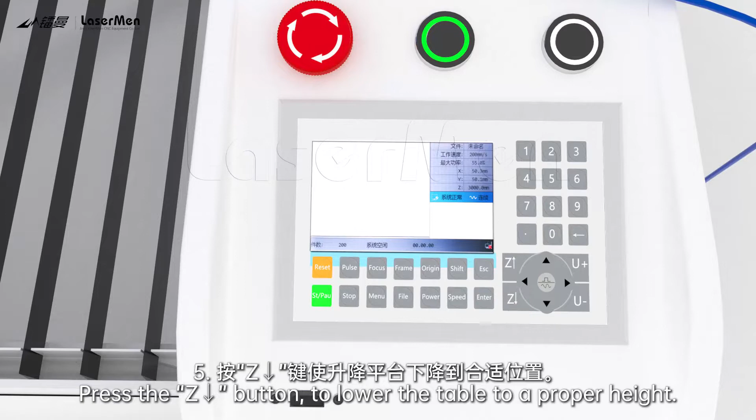3. Press the button to move the laser head backwards. 4. Put the rotary on the machine table. 5. Press the Z↓ button to lower the table to a proper height.

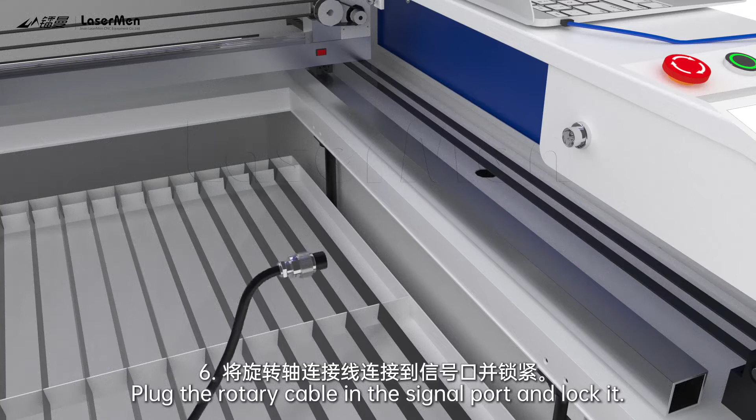6. Plug the rotary cable in the signal port and lock it. 7. Press the direction buttons to move the laser head to be right above the rotary.

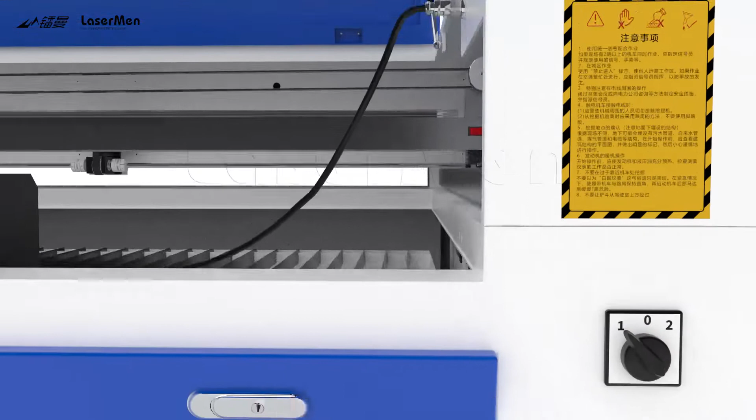8. Turn the switch to port 2. 9. Draw in laser software.

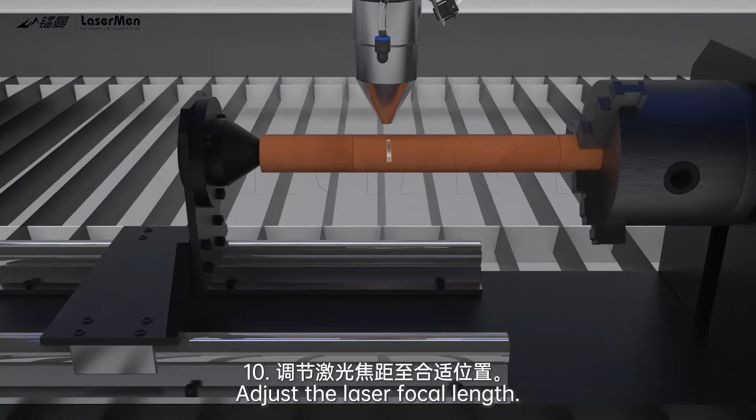10. Adjust the laser focal length. 11. Press origin to locate the laser head. 12. Press start/pause to cut.

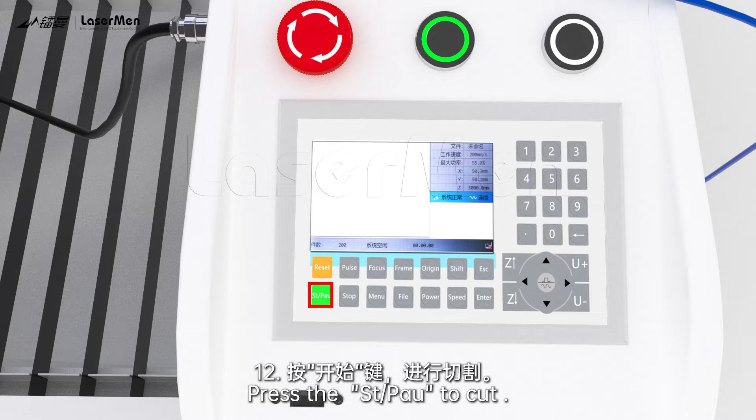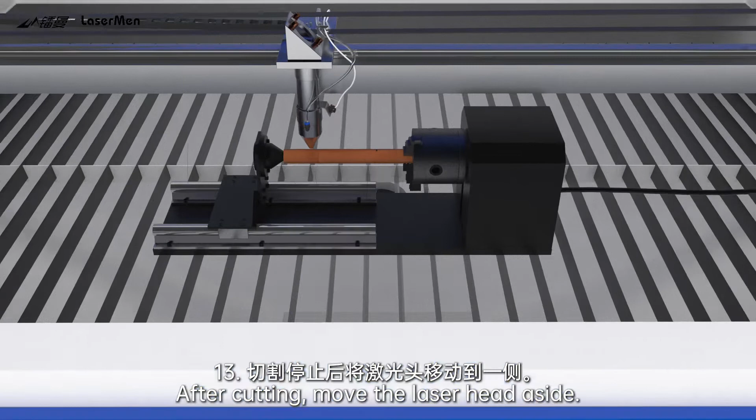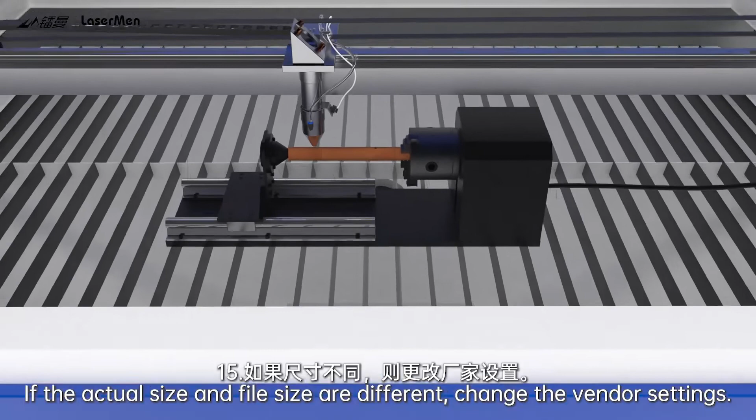13. After cutting, move the laser head aside. 14. Measure the actual cutting size with a tape line. 15. If the actual size and file size are different, change the vendor settings.

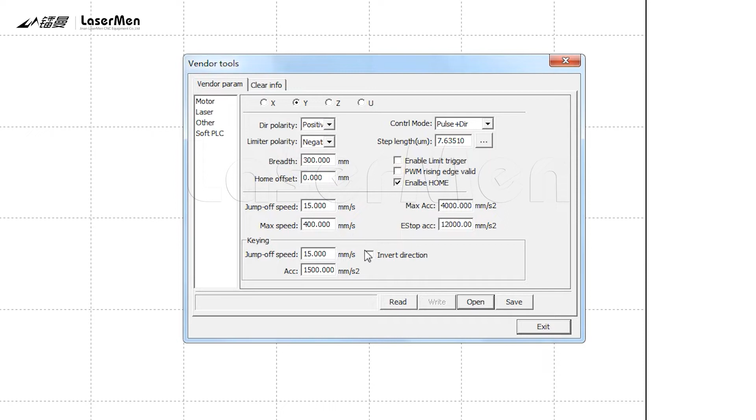16. Go to vendor settings. Save the original parameters, then change to rotary parameter. 17. Fill the file size and actual cutting size to Y step length.

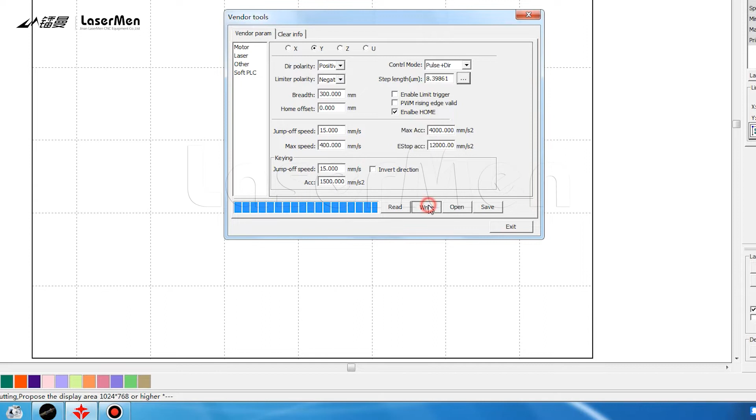18. If sizes are the same, go next. 19. Import file to laser software and download file to machine.

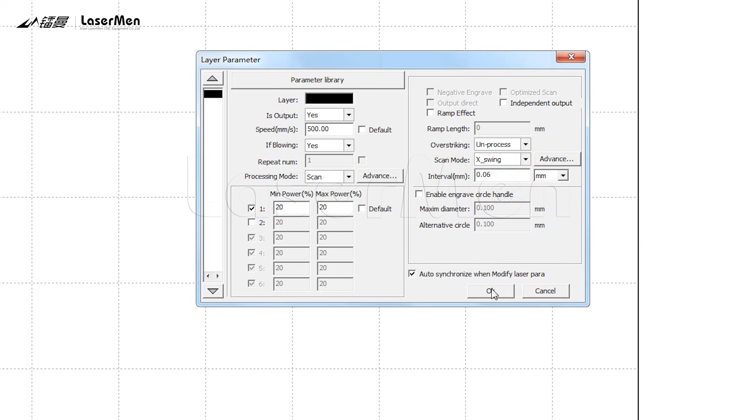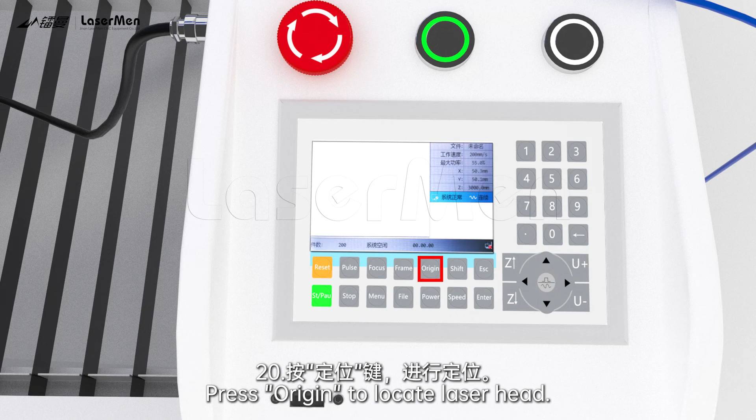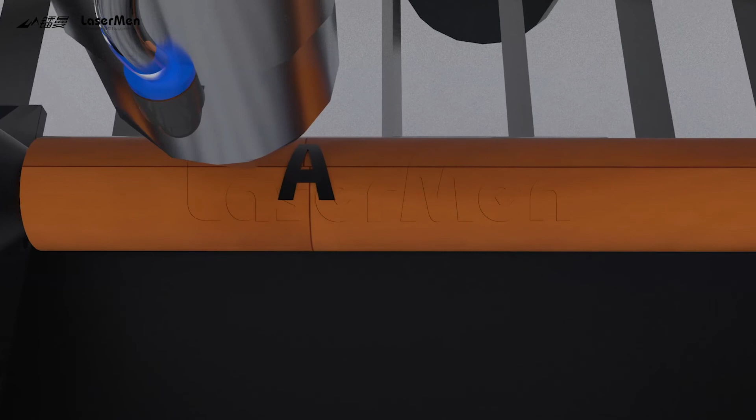20. Press origin to locate the laser head. 21. Press start/pause to engrave. 22. This is the using of rotary.